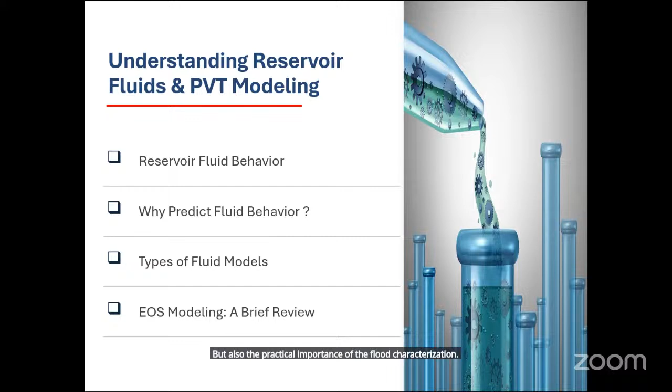So let's keep going in the presentation and define the reservoir fluids. They are complex mixtures of hydrocarbons existing in a dynamic state influenced by extreme pressures and temperatures. They do not behave as pure liquids or pure gases. So whenever we are talking about a hydrocarbon mixture, do not relate the behavior to liquids such as water, because water is a pure component. It doesn't act like the hydrocarbons. So they show properties of both phases, shifting continuously as conditions change.

An important point to focus on, and keep that in mind: no two crude oils are identical, because the composition is like a person's fingerprint, so you can't replicate it. Each sample contains unique proportions of various hydrocarbons and sometimes non-hydrocarbon components, resulting in very distinct physical behaviors. So for that, we classify the reservoir fluids into 5 main types.

The dry gases, which are found as a gas phase at the reservoir conditions, and what we mean by the reservoir conditions is the pressure and temperature, will not condense any liquids during their path of production. While the wet gases behave like dry gases inside the reservoir, during the path of production and temperature change they will condense liquids. So they pass through the dew point curve. And we will know about the dew point curve and the bubble point curve in the following slides.

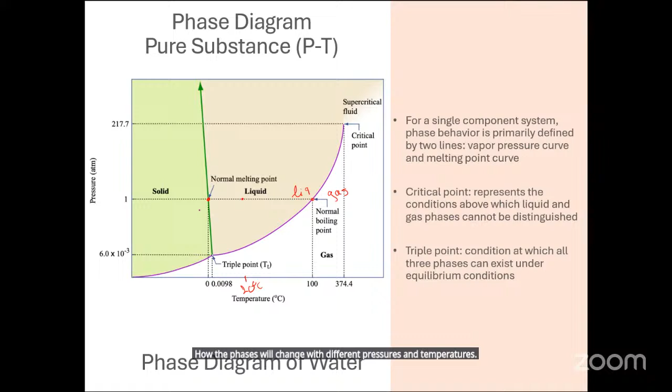So the phase envelope consists of three main parts: the bubble point curve, the dew point curve, and the intersection between them, which represents the critical point. So to make it simple, to the left of the critical point and outside of the phase envelope, you will find 100% liquid. And to the right of it, you will find 100% gas, while inside it, you will find the two-phase region.

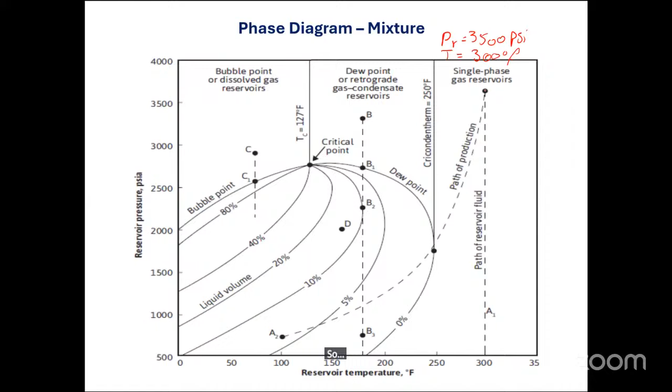If we have our initial condition, which is represented by a reservoir pressure of, let's say, 3,500 psi, and temperature of around 300 Fahrenheit, so our point will lie nearly in here, because this is the temperature and this is the pressure. So this is our initial condition. And because we are to the right of the critical point, then we will have a gas reservoir as a single phase. And we want to test which type of gas is this.

So let's make two tests. The first one is to decrease the pressure, maintaining the temperature, and see whether condensate will start to condense or not. So the direction of the pressure is that way. So when decreasing the pressure, we will not hit the dew point and will not enter the two-phase region. So by that, it's either a wet gas or dry gas.

The second test is to test whether point A2, which represents the separation conditions, will have condensation or not. So during the path of production, as we can see, we will hit the dew point curve, and this marks entering the two-phase region. So it's a wet type gas. So let's assume that our initial temperature was not 300 Fahrenheit, it was about 100.

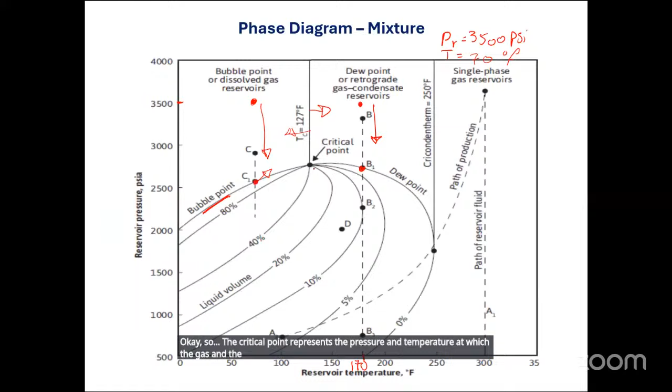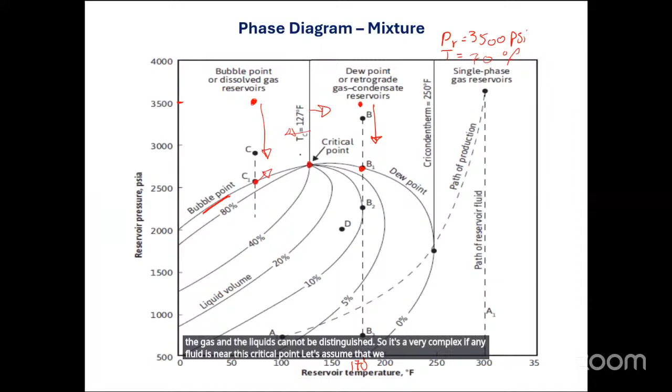We had a question from Ahmima. She was asking what is the state of the matter above the critical point. Okay, so the critical point represents the pressure and temperature at which the gas and the liquids cannot be distinguished. So it's very complex. If any fluid is near this critical point, let's assume that we have an initial pressure and temperature that is very close to the critical point like that, okay? So it will behave differently and it will be very complex to model it, because at the critical point, we will not have the privilege to differentiate whether it's a gas or oil.

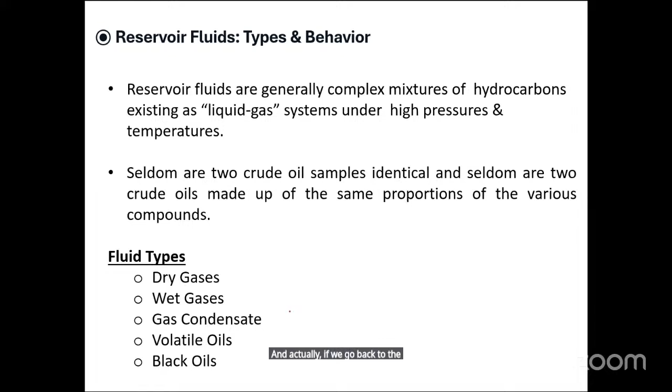And actually, if we go back to the fluid types, some references put in here a sixth fluid, which is called near critical fluids. So the near critical fluids cannot be modeled except with the equation of state. And their behavior is unpredictable. And so if we have a field that is working within the near critical conditions, then our field development plan should be changed. And we must determine whether it's initially gas or initially oil.

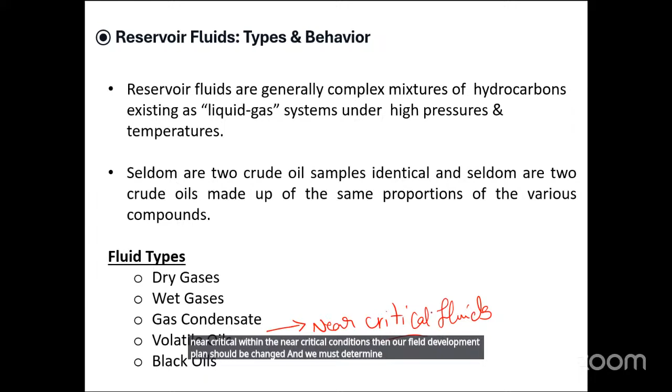Because as you can see on the phase envelope, just, let's say, 100 psi or so will change the fluid type within the temperature window of around 50 Fahrenheit. So it can be here or here. And here it's a gas condensate, while here it's a volatile oil. So it's very difficult to differentiate between them. Did that answer your question?

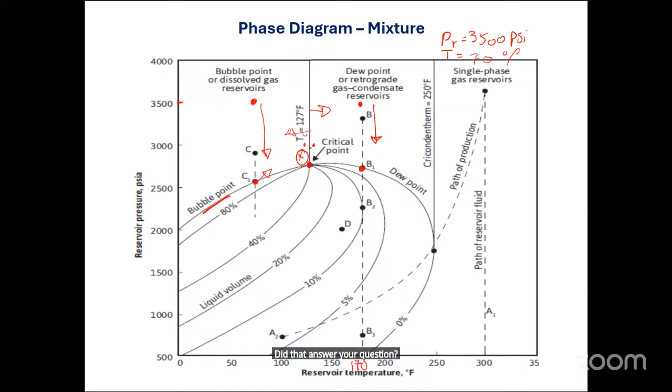Yes, thank you. Please continue. Okay.

So why do we need to go through all this hassle to know the fluid behavior? This is because every component of the petroleum system, from the reservoir to the well bore, through the surface facilities to the final processing, is governed by one vital variable, which is how the fluid properties change with pressure and temperature. As fluids ascend from the reservoir to the surface, they encounter significant pressure drops and thermal gradients. This journey alters their density and viscosity, and also the phase compositions. Therefore, accurate prediction of these changes is essential for us.

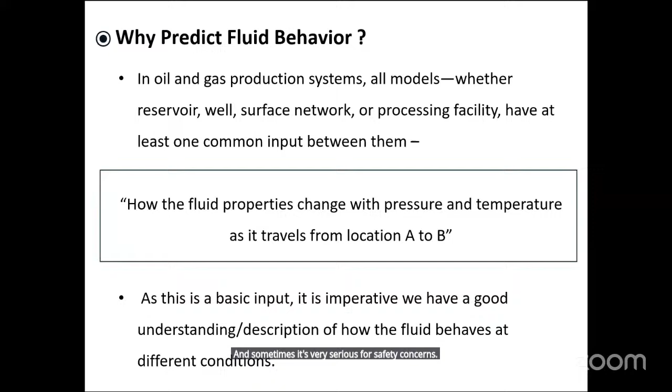Because if you are going to model something like simulation and you want to forecast, you won't know the liquid percentages in a gas condensate type. So we will need a robust model to know whether we are going to have large liquid volumes or low liquid volumes. So without robust fluid models, we risk poor decision making for sure. And sometimes it's very serious for safety concerns. And that's why we will teach you about the fluid models.

So we have two basic fluid models. The first is the black oil correlations, which are empirical correlations that relate surface measurements such as oil API and gas oil ratio to subsurface properties like formation volume factor and the bubble point. The black oil correlations are very fast, simple and reasonably accurate within their experimental ranges. So what is meant by experimental ranges? Being empirical correlations, they have ranges, and we have a bunch of black oil correlations.

So let's imagine together that I'm dealing with a fluid with a gas oil ratio around 800 and API of 33, and I use a black oil correlation within these ranges. So it gives me good results. However, if I'm dealing with another field where the API is around 20 and gas oil ratio around 100, then I can't use the same black oil correlation that I used from the offset. This is because the experimental ranges of the black oil correlations govern the output. This is one of the cons of the black oil correlations.

And another one is that there is no output composition from such models. And because of that, the equations of state are there. The equation of state is mainly used to model the volatile oils and gas condensates, because the black oil correlations fail to give us a physical meaning of how the liquids start to condense from the gases.

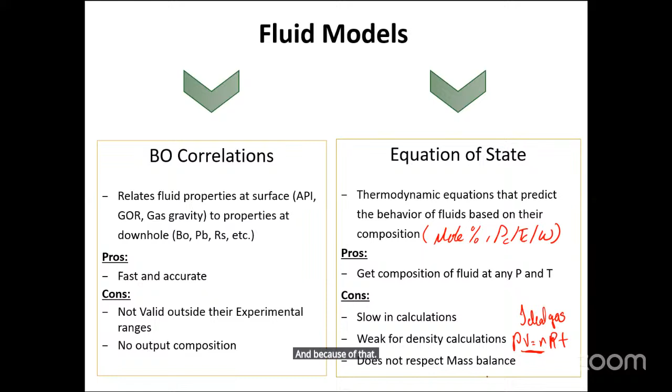So if you break down these equations, the inputs that you need to run the Peng-Robinson equation of state are number one, the critical temperature, number two, critical pressure, three, acentric factor. These are our inputs, and without them, we can't run the Peng-Robinson equation of state. So for now, you know that we need to determine these properties accurately so that the equation of state can give us accurate data. Based on that, let's talk about the critical properties of heavy components, such as C7.

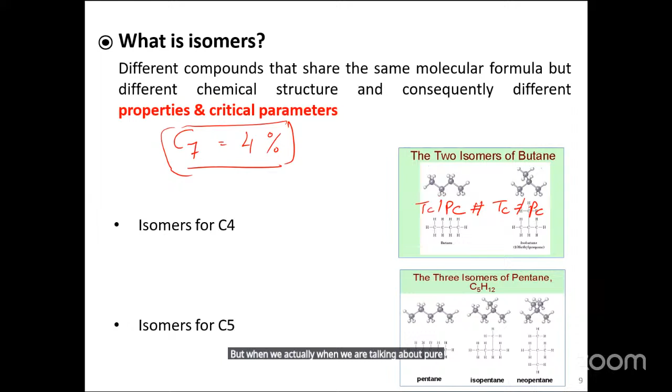So this makes the fluid more complicated. We don't know the composition of the isomers, and so we don't know the critical properties that should be assigned for something like C7. But when we are talking about pure components or components with a low carbon number, then the number of isomers will be small.

So as you can see here in the table, C6 has around 5 isomers, while C7 has 9. Going down to C10, you will have 75 isomers. Then C20 will have 366,000 isomers. So as you can see, it's becoming complicated, and the number of isomers is increasing exponentially with the carbon number.

Instead, the lab simply reports something like, as we said, C7 equals 4.5%. This is what the lab gives us, okay? It doesn't state that the normal C7 is around 2%, and then isomer number 1 is around 0.5%, isomer number 2, no, it doesn't give that. It gives us a lumped value. So actually, we don't know the critical properties of the heavier hydrocarbons.

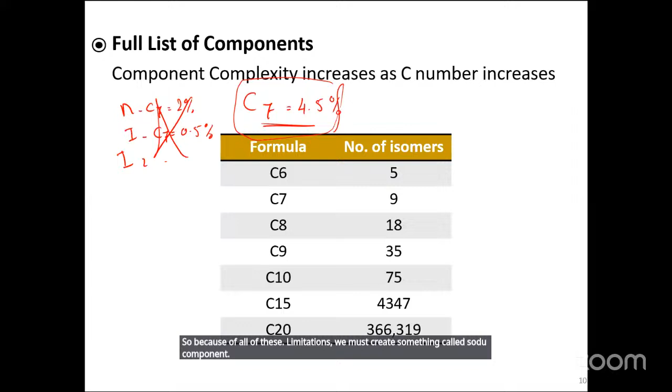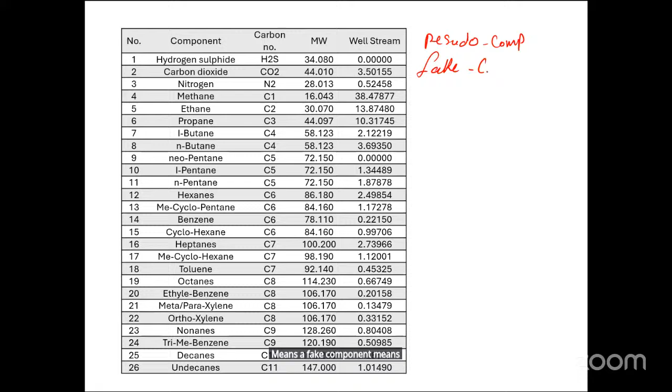So because of all of these limitations, we must create something called a pseudo component. And by the meaning of pseudo, it's a fake. So let's put it that way. A pseudo component means a fake component. Instead of treating each carbon number as a true chemical species, we group them into a pseudo component based on the boiling point ranges or molecular weight ranges.

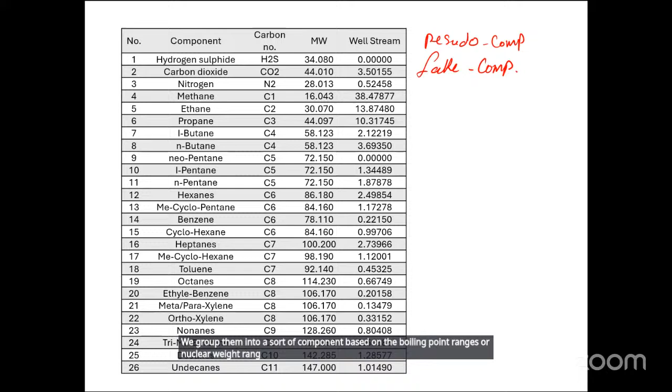For each pseudo component, we assign the average properties in a way that it gives the same behavior of the heavy end tail of the composition. So what we want to do is assign a fake component and then give it the lump of the mole percentages of the heptanes. So here are the heptanes. This is the C7, the start of the C7. We know that C7 has around 9 isomers, and as you can see, the lab reports only 3. So we have uncertainty here.

So from there, we lump all the composition together. Okay, let's say it's around 30% when we sum all the mole percentages of the C7 plus. And so we have the mole percent of 30%, and we need to assign the critical properties. So what we are going to do is calculate the critical properties based on the molecular weight and specific gravity of the tail. And the molecular weight and specific gravity can be obtained from the lab because the liquids represent heavy components, and most likely from C7, they form the liquids.

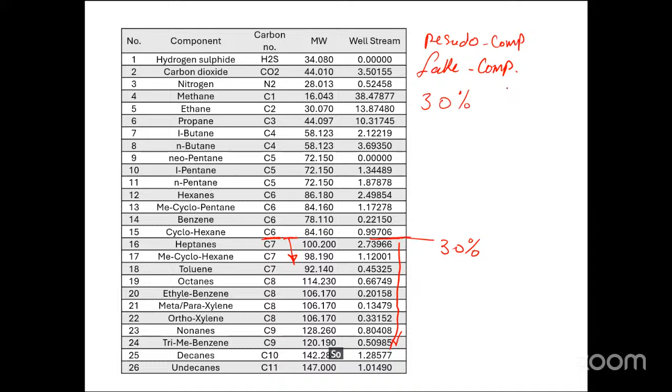So we know that if we have the molecular weight and specific gravity of these liquids, then we will have the molecular weight of the heavier hydrocarbons. So from the molecular weight, specific gravity and boiling points, we will get the critical properties, which are Tc, Pc, and acentric factor. And from that, we will monitor the equation of state, whether it can give us a good API gravity and gas-oil ratio that matches the fluid type or not.

So let's repeat that again because this is a very important point. The goal is to capture the real behavior of the heavy tail of the fluid composition. And because of that, the heavy end that controls the liquid phase behavior, represented by the C7 plus fractions, can match the API gravity by controlling the overall fluid density, and also the gas-oil ratio and saturation pressure. So we must tune them carefully to match the laboratory measurements. And this ensures that our equation of state behaves like the real reservoir fluid, even though we do not have detailed knowledge of the true heavy end composition.

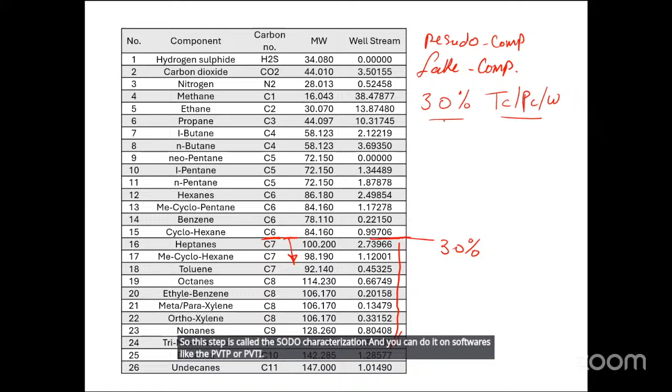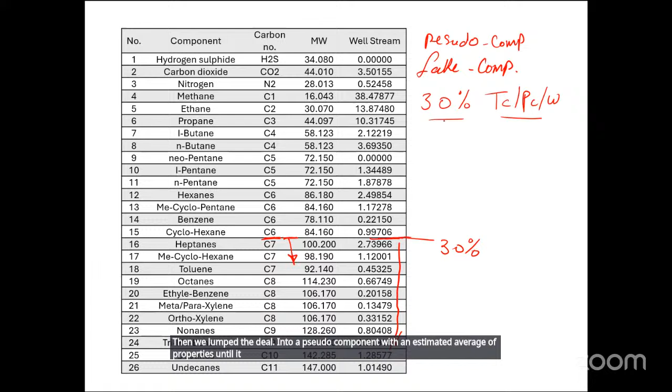So this step is called pseudo characterization, and you can do it in software like PVTP or PVTi, which are specialized in equation of state modeling. So in simple terms, the lab gave us C7 through C36 mole fractions, but without isomer details. And as you can see, this is a lab report, and we don't know the mole percentages of all the isomers. So without knowing the isomers, we cannot assign correct critical properties to each carbon number. And based on that, we lump the tail into a pseudo component with estimated average properties until it gives us a good match on the API, the gas-oil ratio, and the saturation pressure.

So how it works on the software: the first thing that we need to do is to get the composition from the lab. So we take a sample from the field and then take these samples to the lab to do recombination to assure that we have a representative composition of the actual reservoir fluid. And we do some experiments on them, such as CCE and differential liberation. And from that, we QC the lab data to ensure that everything is consistent.

Then we start to define the pure components. And as we said, for the pure components, such as methane and ethane, we know the mole percent, and we know their critical properties because these are very well-known critical properties. And then we start to define the unknowns and lump them so that we can define the pseudo components.

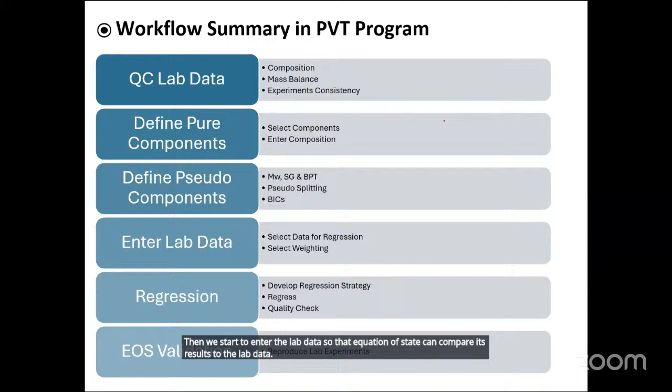And here is the trick. Before we continue with the equation of state, we must make sure that the pseudo components can represent the fluid tail, okay, by a good match on the API, gas-oil ratio and saturation pressures. Then we start to enter the lab data so that the equation of state can compare its results to the lab data. And finally, we do the equation of state validation.

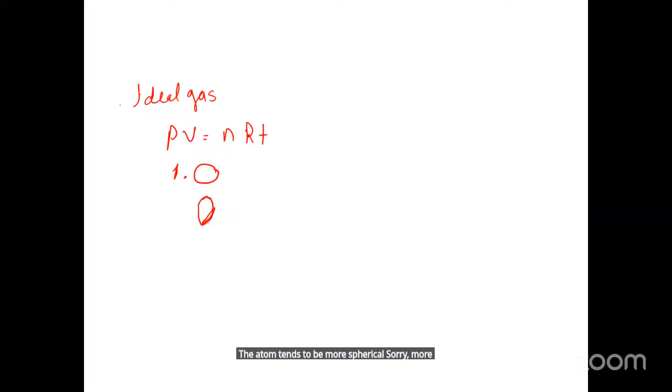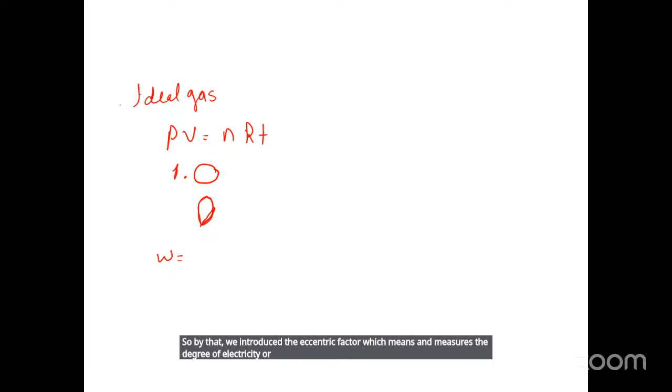more elliptical than spherical. So by that, we introduce the acentric factor, which measures the degree of ellipticity or sphericity of the molecule to cure the assumptions of the ideal gas law. So it's the measurement of the degree of sphericity of the molecule.

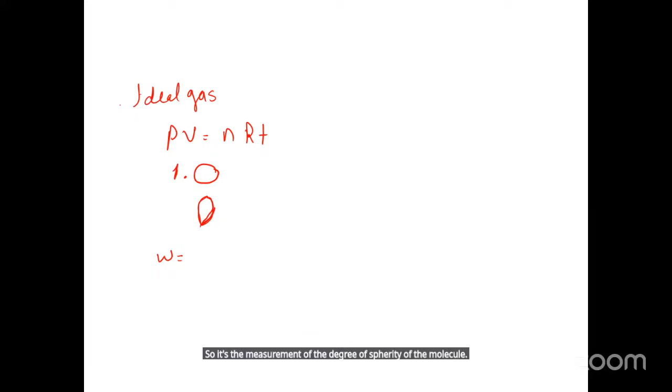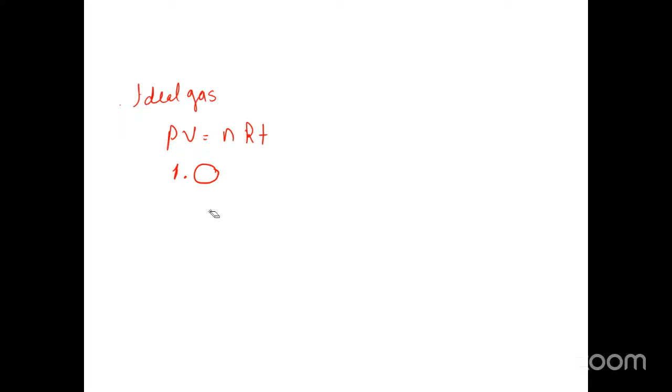Okay, thank you. We have a question from Engineer Muhammad: what does CCE stand for? Constant composition expansion. Constant composition expansion, and this is an experiment that is done in the lab.

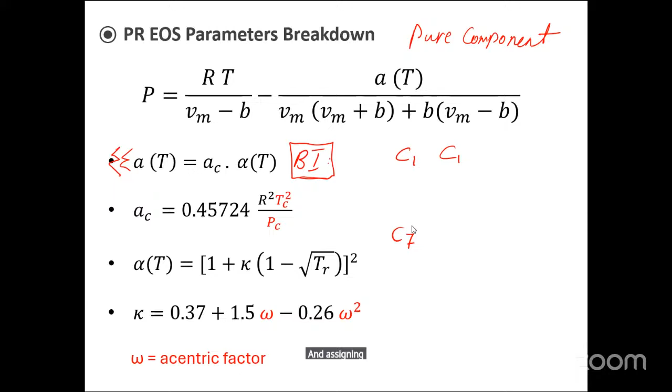We have a question from Engineer Hassan. He needs more clarification about the isomers part and assigning the right critical properties to right SCN. I'm sorry, I didn't hear it right. Can you repeat it again? Okay, I repeat it. He needs more clarification about the isomers part and assigning the right critical properties to right SCN. I don't know what SCN stands for.

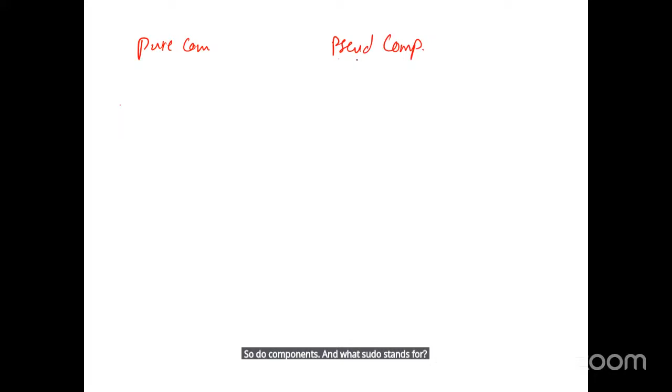Okay. So I will try to make it simpler. What we have is pure components and pseudo components. And what pseudo stands for is fake. So let's put it in that term: it's a fake component, okay? And why do we introduce a fake component to the composition?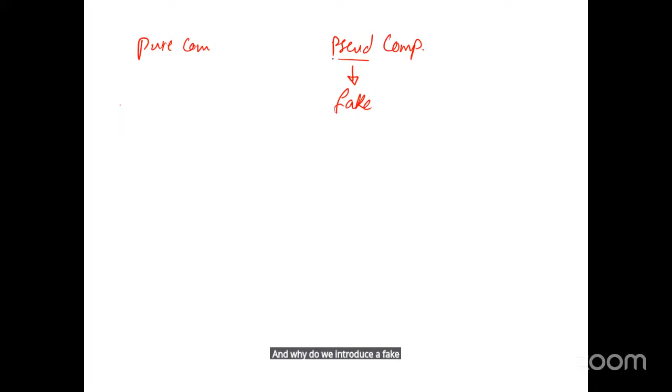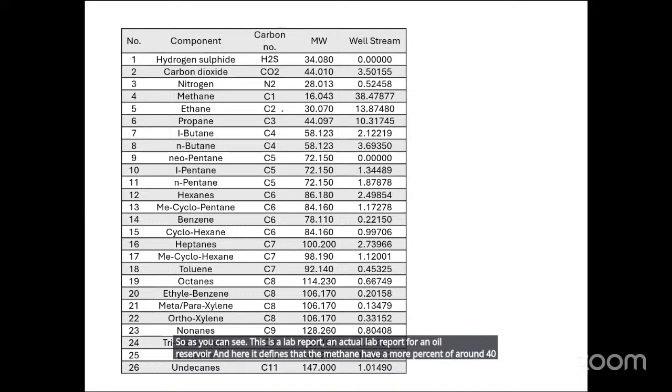As you can see, this is an actual lab report for an oil reservoir. Here it defines that the methane has a mole percent of around 40, and then the ethane, which is C2, around 13.8, and so on. When you come to the C4, the lab report defines two components, not only one, and this is because of the isomers. So what is an isomer?

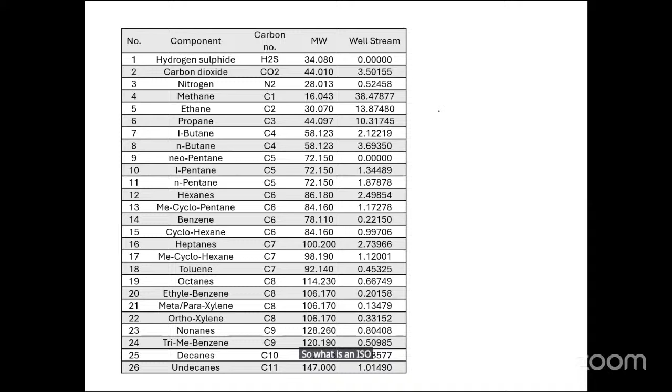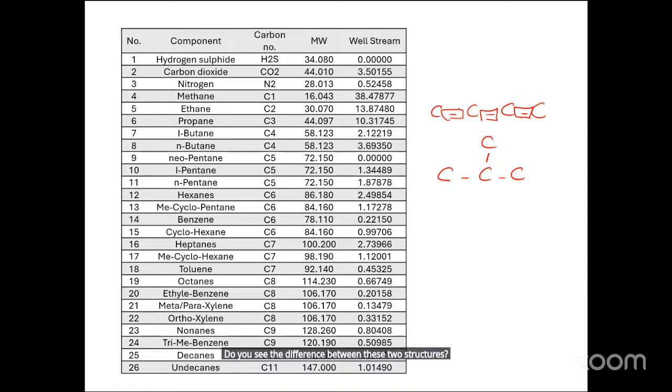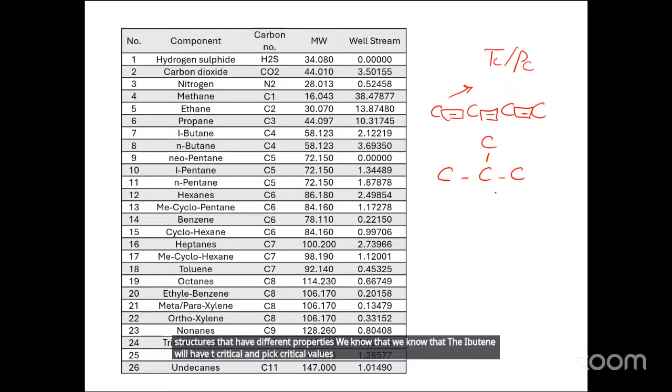We know that the C4 contains 4 carbon atoms, so it's something like that. This is the bond between each carbon. So what happens when we change this bond to be something like that? Do you see the difference between these two structures? They are two structures that have different properties. So we know that the i-butane will have T-critical and P-critical values that are different from the n-butane. So we'll have two critical values for the C4, one that describes the i-butane and the other for the n-butane.

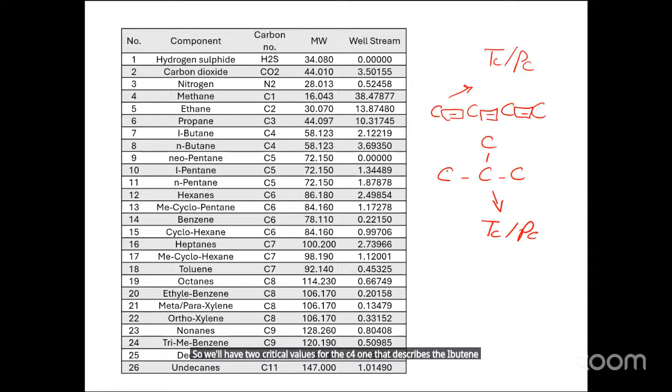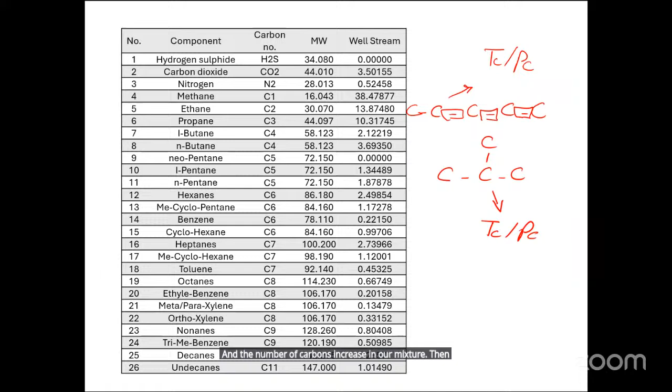If we go to the C10, we have 75 different isomers, so 75 different structures for the links. Based on that, we would have to define 75 critical properties, one for each structure. And this is very difficult, and the lab cannot give us all the isomers that are there in the composition. So that's why we assume that we have a pseudo component. This is an assumption, which is a fake one.

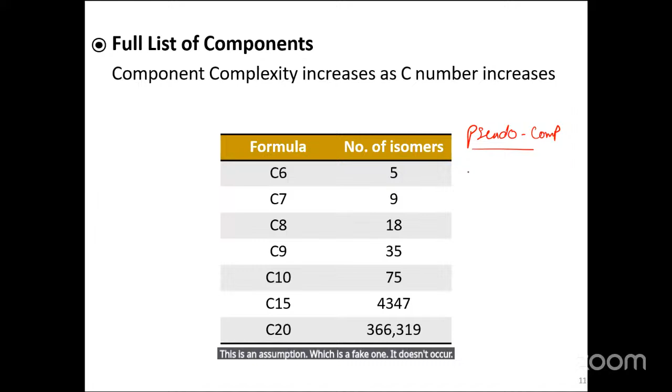It doesn't occur. And this pseudo component has a mole percent which is equal to all the mole percentages of the heavy molecules. So if we assume that we have here 10% of C6, 9% of C7, 8% of C8, 5% of C10, when we sum all these mole percentages, we get the pseudo component mole percent. Let's say it's around 30%. So the pseudo component represents 30% of the whole composition.

What we need to do is assign the critical properties for this pseudo component. So here comes the problem. Where should I take the critical properties from? This is a fake component that I just introduced inside the equation of state. So in order to assign the proper critical properties, we go to the molecular weight. We have the molecular weight and specific gravity of the C7 plus fractions, and the lab can report it. With some correlations, we can get the critical properties and assign them to this pseudo component.

Our composition now consists of pure components until the C6, and then there is no C7 or C8 or C9. There is only the pseudo component. So the equation of state can run now because we introduced the pseudo component, which is equal to the sum of compositions of all the heavy molecules. Based on that, we will have results from the equation of state, such as the oil API, gas oil ratio and saturation pressure.